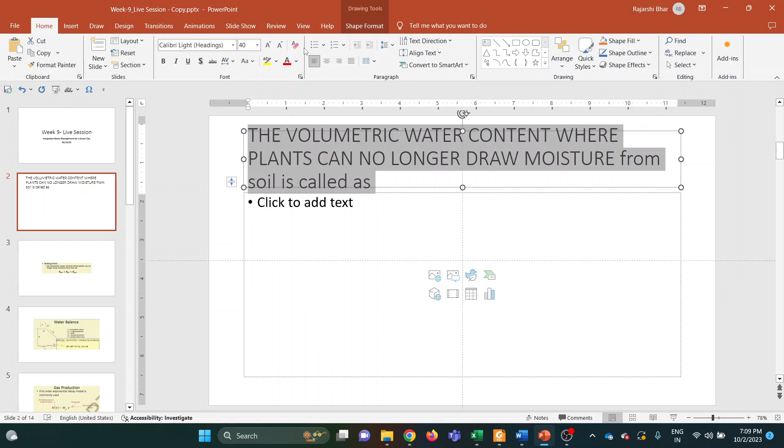The first question, I will type it first. So the question is, the volumetric water content where the plants can no longer draw moisture from the soil is called. A very basic question which we have also read or been taught, I hope, in some of our school days. I will share the options. So these are our options. You can have about 1 or 2 minutes to think about it and then I will reveal the answer.

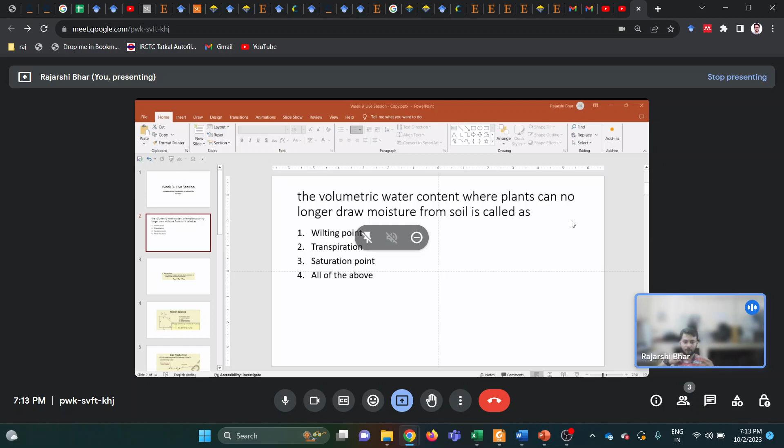Hello. Hello? Yeah. Actually, I'm a bit behind with the course. I have only finished week 8. Week 9 I haven't started yet. So today's discussion is only about week 8, 9, right? Yeah. Okay, so then it's fine. I will just, these are all questions, all very straightforward. I will just discuss them and you can have an understanding of them. And in case, these are all recorded sessions, so usually they are uploaded on YouTube as well. So later on, if you want to again go through these questions, you can always use that option. Where can I find the links for these recorded sessions? Yeah, I will put it in the chat box. Okay, sure. After this, our today's live session, I will put it in the chat box. You can copy it. Okay, fine, okay.

So, okay. For this particular question, the moisture content or volumetric water content where the plants can no longer draw any water from the soil is known as wilting point. After that, the plants start wilting. So this was our first question. Okay, so, okay, fine.

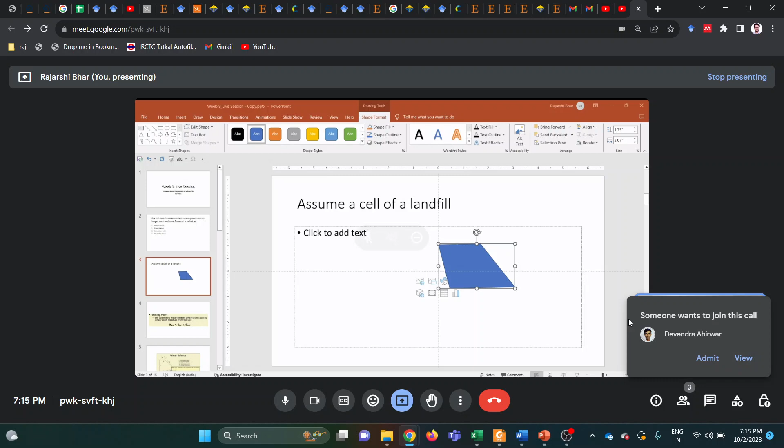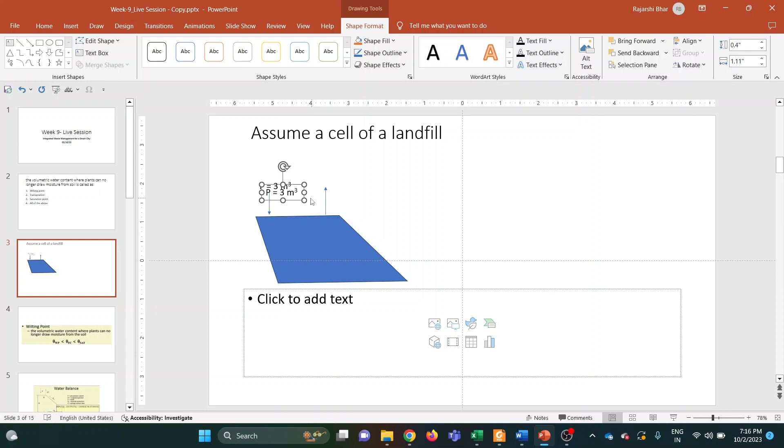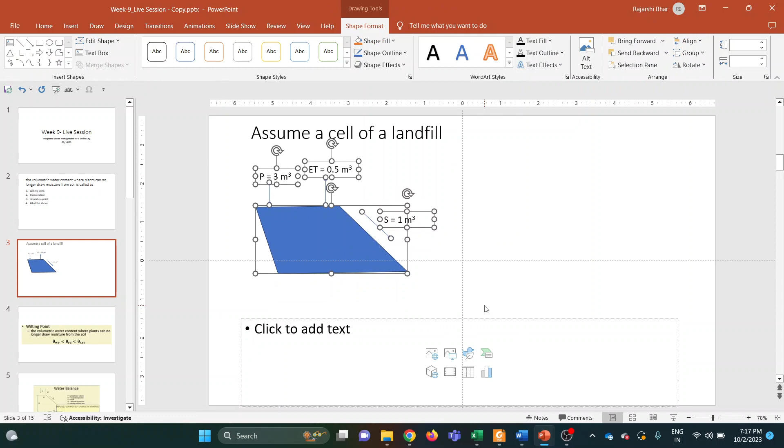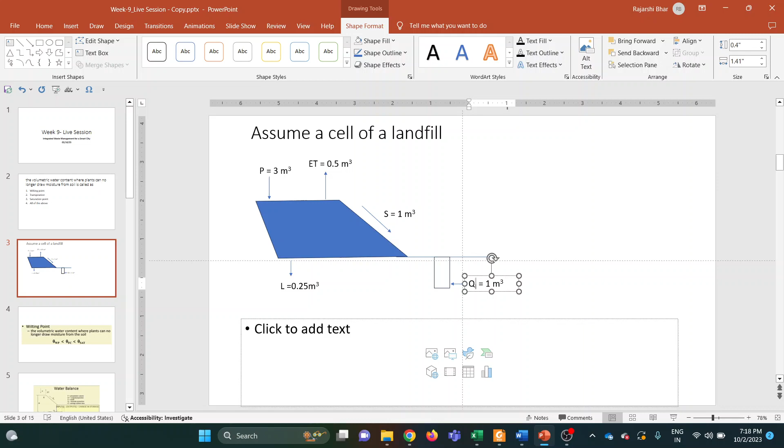Okay, so this is a cell of a landfill. Let's assume that, and I will give you a few data points. P is the precipitation happening here, and the total volume is 3 meter cube. Then we have evapotranspiration, which is 0.5 meter cube. S is the surface runoff. L is the leachate that is seeping out of the landfill liner. And then this is a leachate well. So your question is you have to find out how much of the leachate will be collected inside this landfill.

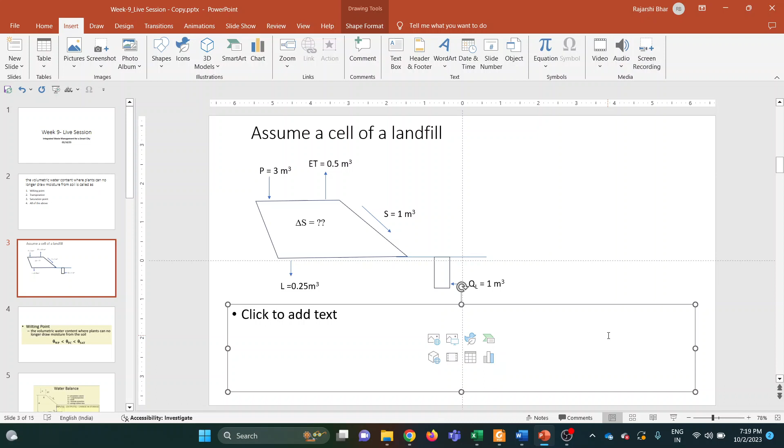So this is the landfill, and usually we denote it this way. This is what we need to find out. I'll repeat the question again: this is a landfill cell where you have to calculate the amount of leachate that will be collected, where P is the precipitation in meter cubes, ET is evapotranspiration, S is surface runoff, QL is the leachate getting stored in the leachate well, and L is the leachate leaking out of the landfill liner. How much leachate will be stored inside the landfill? This is a very simple and basic question. In fact, even someone who doesn't know about landfills can solve this, since it's just a simple mass balance equation. You can take about 3-4 or 5 minutes to think about this question, then we will solve it if needed.

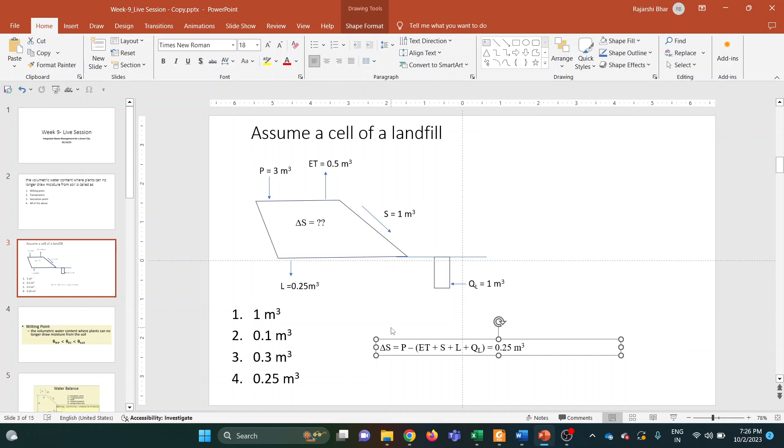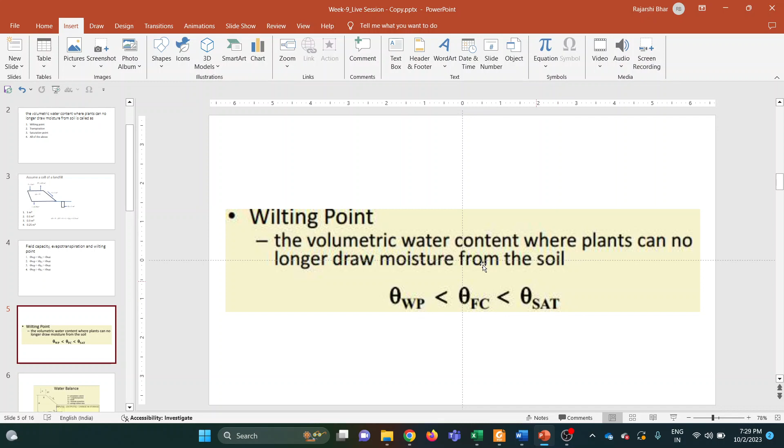As I explained in question number 1, you can see this correlation: wilting point is the lowest one, followed by field capacity and then saturation. So if you look at this question, option 2 will be the correct answer.

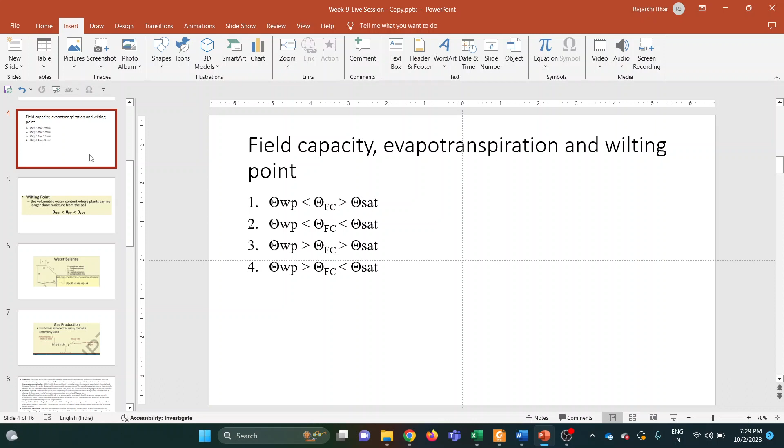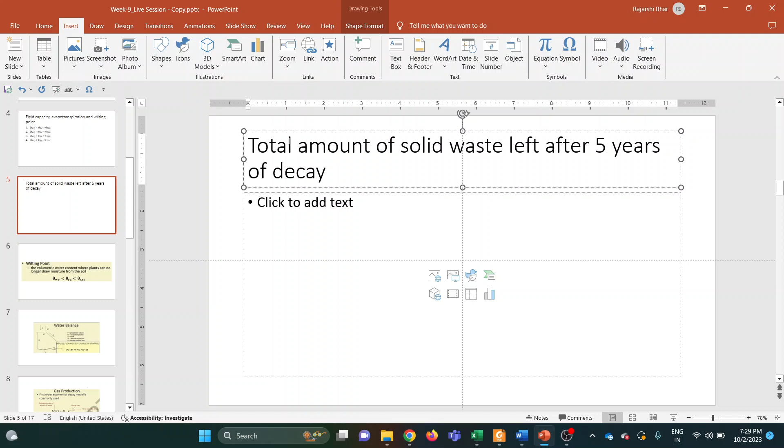Now we will move on to the next question, which is a numerical type question wherein you have been given the total amount of solid waste left after 5 years of decay. So this is what you need to find out. What you have been provided is initial waste, which is 1 kiloton, and decay rate 0.4 tons per year.

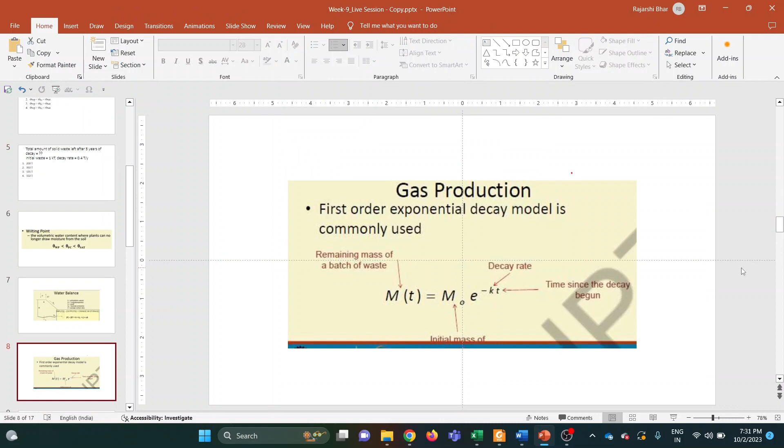A small hint for this question: you can calculate the mass that will remain after 5 years by using this first order exponential decay model. MT is the mass remaining after T amount of time in years, and is equal to m naught e raised to the power minus kt. This is similar to the BOD equation that we often use to determine the BOD of certain waste after certain amount of time. So you can make a note of this particular equation and use it to solve the question.

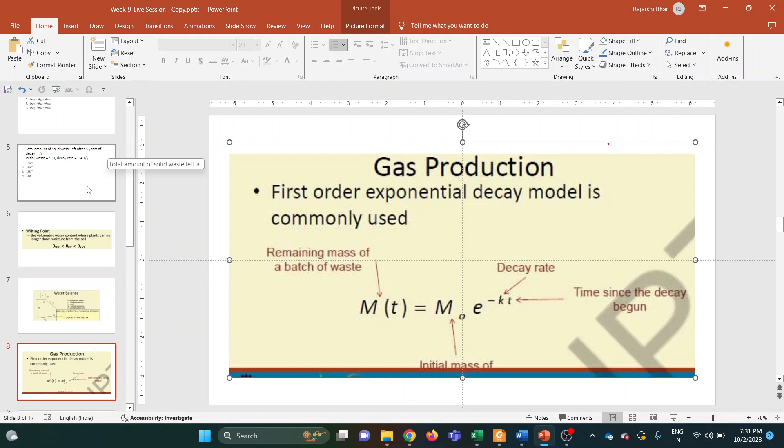I hope you have noted this down. So I will show the question now. You can use the chat box to share the answer, otherwise I will solve this particular question in about 2 more minutes.

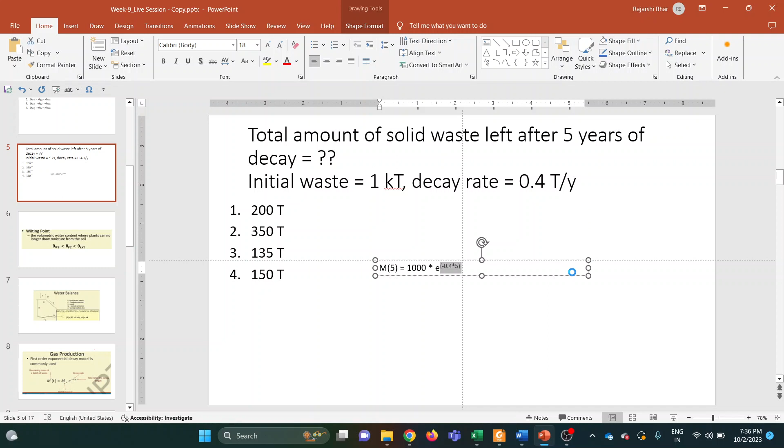Okay, quickly I will solve this. There is nothing complex to solve; you can use a calculator. MT is the amount of solid waste that will remain after 5 years. So initial mass is 1 kiloton, that is 1000 tons, into e raised to the power minus kt, and k is 0.4, into t, where t is the time, that is 5 years. If you solve this equation, you will get the answer, which is around 135 tons, 135.33. So option C is the correct answer.

Now moving on to the next question, which is again a numerical based one. You have to find out how much methane is produced from degradation of SW, solid waste, and the amount of solid waste you have is 1 mole, and this solid waste is getting degraded in landfill. The chemical formula of the solid waste is also shared: C100, H250, O50, and N4.

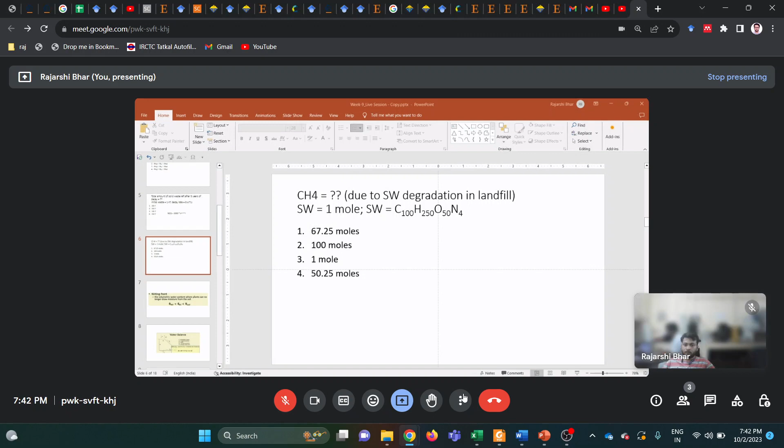Okay, so the formula that you need to use for this particular question will be this one. You can quickly note it down somewhere. This is the chemical formula of the solid waste, and based on this you can use: 4a plus b minus 2c minus 3d, whole divided by 8. This will be the number of moles of methane that will be produced. Based on this, you can simply use your calculator to find the same.

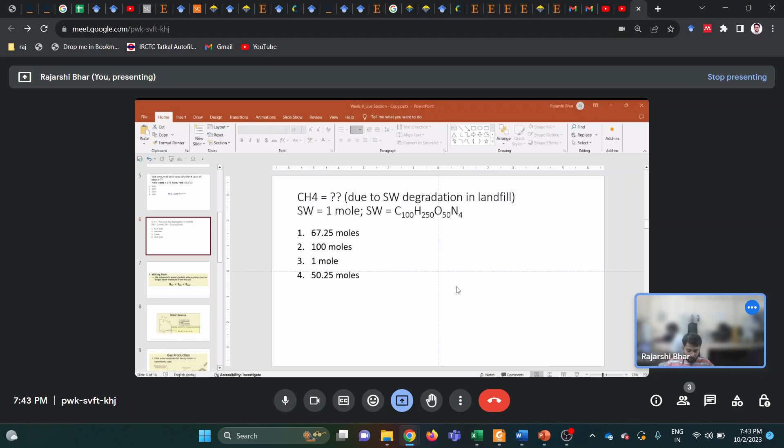So now this is very easy, I hope you can quickly calculate the answer. Simply using that particular equation, the correct answer is 67.25 moles. So now we will move on to the next question.

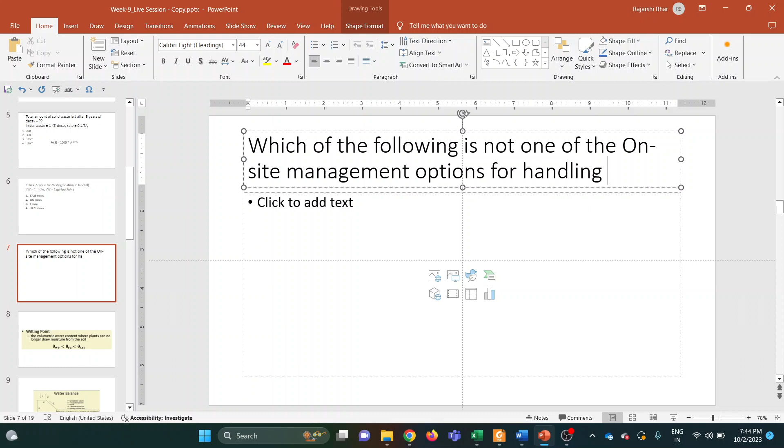And this is a normal theoretical based one: which of the following is not one of the on-site management options for handling of construction and demolition waste? Yeah, so these are your options. You can take a couple of minutes to think about the answer, and then we will have a small discussion of the same.

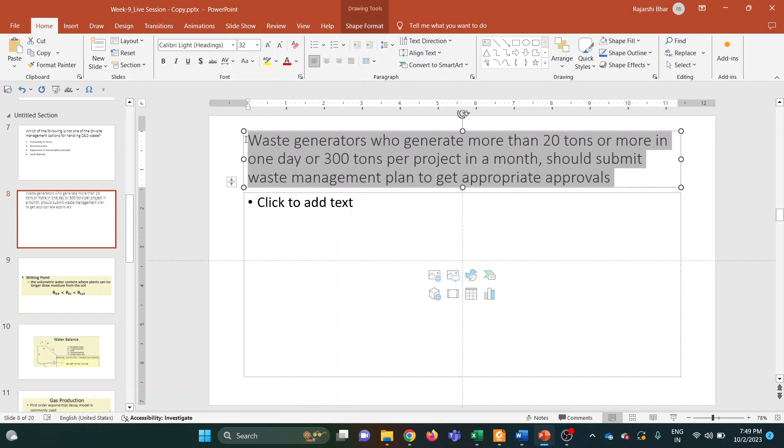The statement is: waste generators who generate 20 tons or more of waste in one day, or per project generate about 300 tons or more waste each month, should submit a waste management plan to get appropriate approvals. So the keyword is 20 tons or more per day, or 300 tons or more per project each month - in that scenario, they have to submit a waste management plan. So do you think it is true or false?

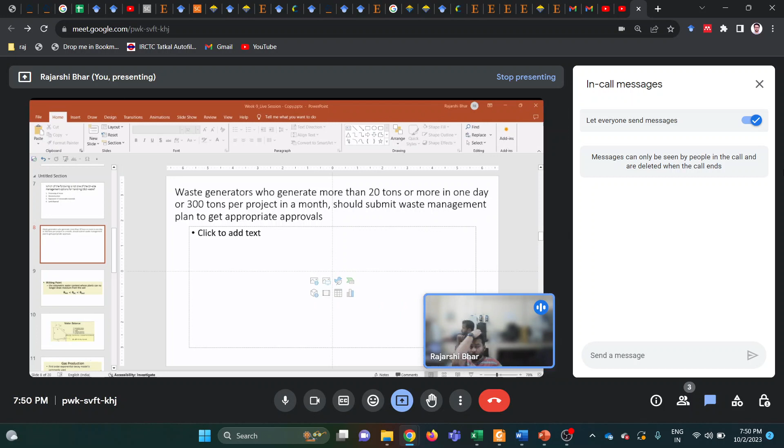You can use the chat box to type your answer as well.

Now moving on to the next one. Okay, so this is also a very basic question that we have studied in our schools.

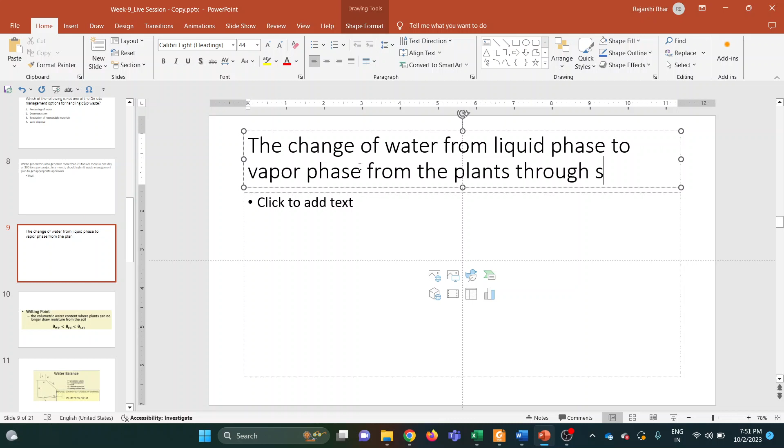So when water is converted from liquid phase to vapor phase from plants through the stomata openings, what is that event or process called? Your options are these. You can think about this for 2 minutes.

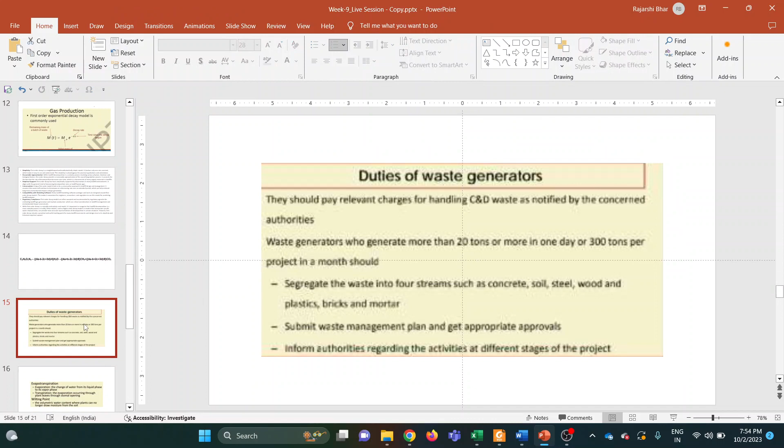Just a note, what will be the difference between evaporation and vaporization? This is very crucial because in both definitions, liquid phase water is getting converted to gaseous phase. In case of evaporation, the conversion occurs below the boiling point, but in vaporization, by definition, the conversion of liquid phase to gaseous phase occurs at the boiling point of that particular liquid. So that is the basic difference.

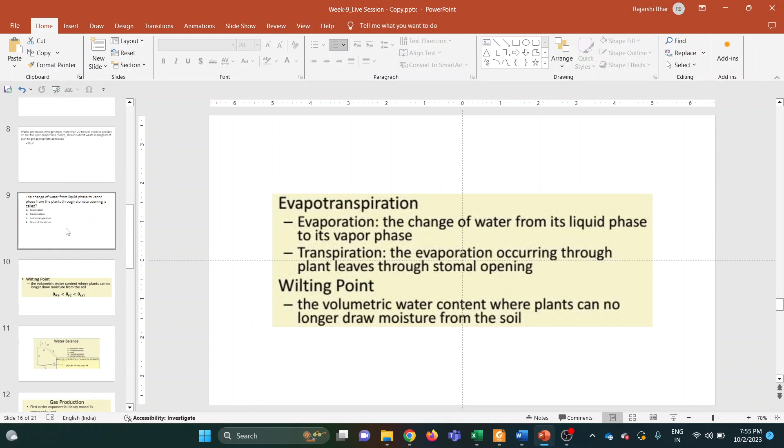So now we will be moving to the next question.

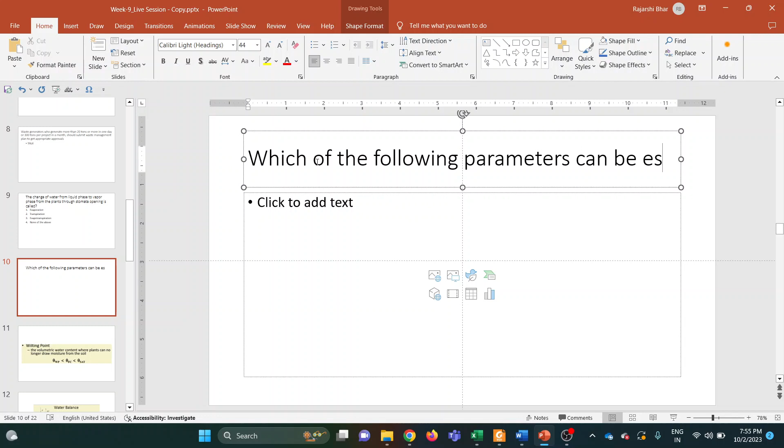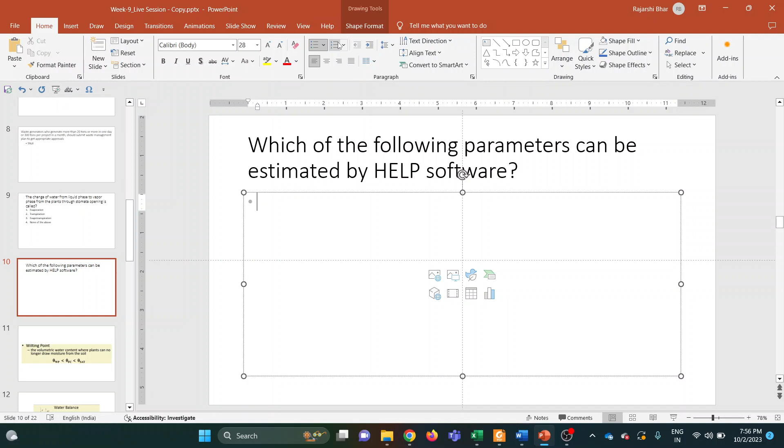So which of the following parameters can be estimated by the HELP software? HELP model is hydrologic evaluation of landfill performance, so the short form is HELP. Which of the following parameters can be estimated by using this model or software? And your options will be...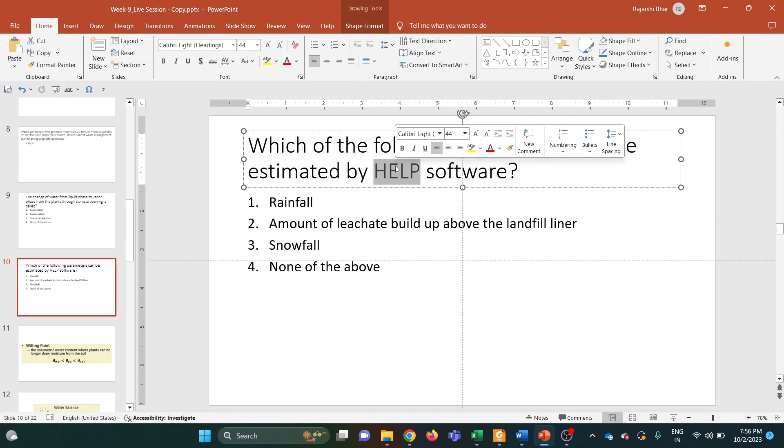Okay, you can have 2 minutes to think about this question. Very simple and very easy. HELP full form is hydraulic evaluation of landfill performance. For these kind of questions, even if you don't know the parameters, if you look at the options and apply common sense, it is very easy.

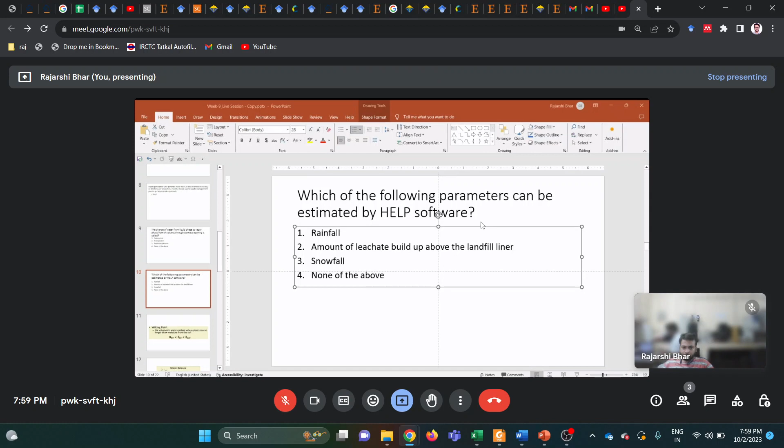Okay, so the correct answer for this particular question is option 2. This software can help me calculate the amount of leachate buildup in the land above the landfill liner. So now we will move on to the next question.

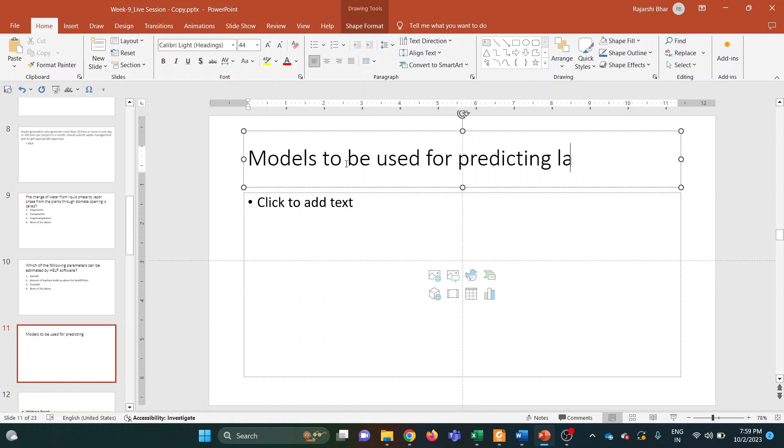So which of the following models will be used for predicting landfill gas generation? One will be the HELP. You can again have 2 minutes to think about this question.

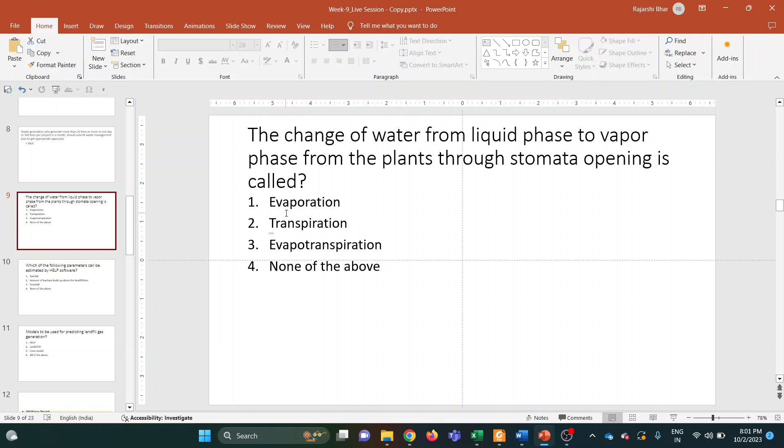So this is what we see around us in various seasons. Now, in the next question, the point being asked is which of the following parameters can be calculated using HELP software. The correct answer is the amount of leachate buildup in the landfill above the landfill liner. That is one of the parameters it can help us calculate.

And in this particular question, you have to select the model that is used for calculating or predicting landfill gas generation. You can have about 1 minute to think about this.

So the right answer for this particular question is LandGEM. If you want to know the full form, it is Landfill Gas Emission Model - G is gas, E is emission, M is model. So this is the full form. Moving on to the next question.

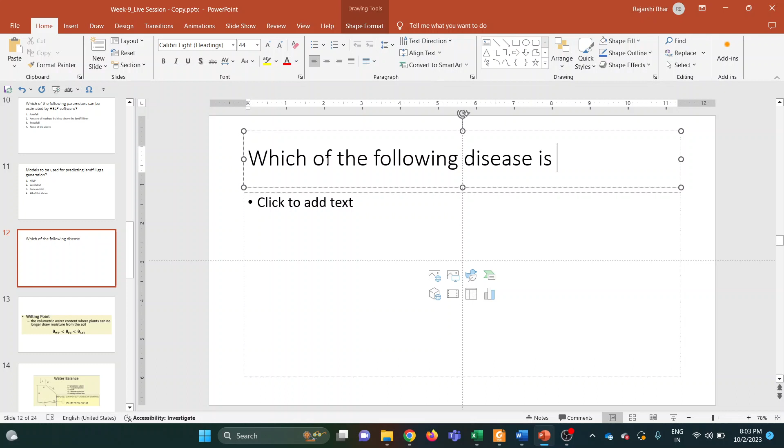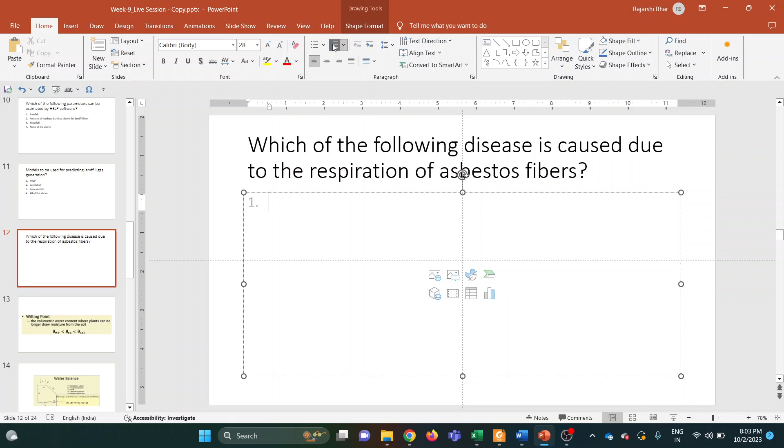So the question is, which of the following diseases is caused due to the respiration of asbestos fibers? I will write the options. You can think, you have 1 minute.

So lung cancer is the correct answer in this particular question. Apart from lung cancer, there is another disease that can be caused due to it, and this disease is mesothelioma. If you want to read about it, asbestos exposure is one of the primary risk factors that causes this disease, and it accounts for up to 80% of all the cases. Then, living with someone who works with asbestos may also increase an individual's risk for developing this disease, because asbestos particles can travel on skin and clothing. That can be another reason - people who live with someone who works with asbestos will also be at risk of this disease. So now moving to the next question.

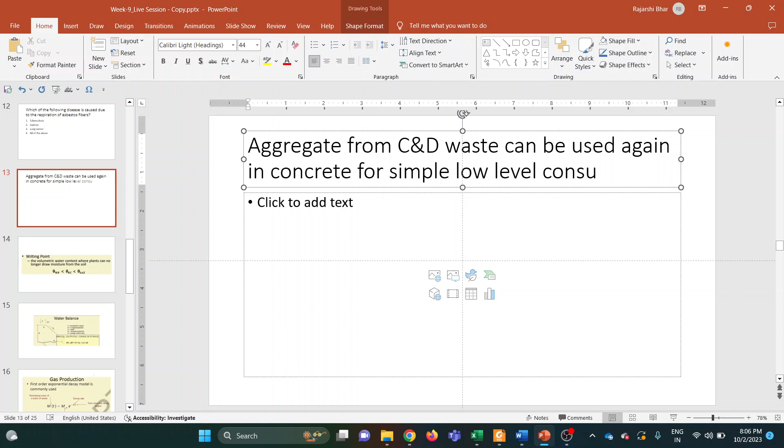It is a true and false type question. So the aggregate that you obtain from C&D waste can be used again in concrete in simple low level construction buildings. Very easy - what do you think, is it true or false?

So the correct answer is true. Now coming to the next question.

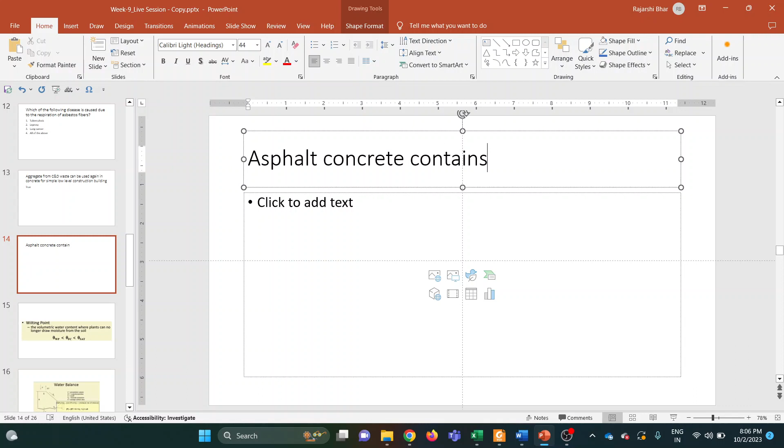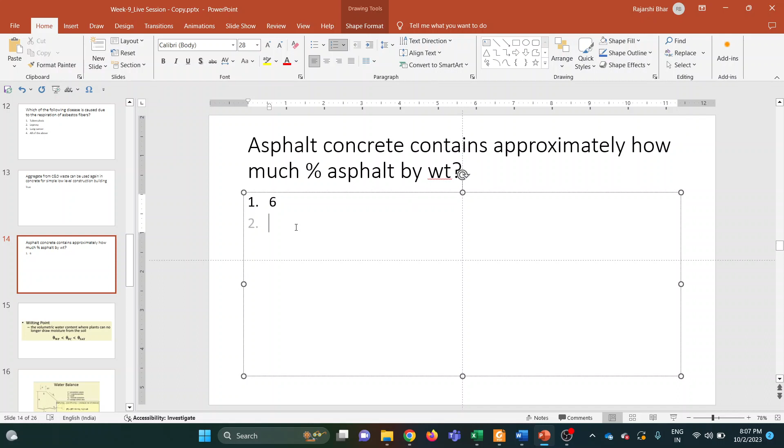So in asphalt concrete, how much percentage of asphalt is there by weight? So this is the question - in asphalt concrete, what is the proportion of asphalt by weight? All the options are in percentages. So these are your options.

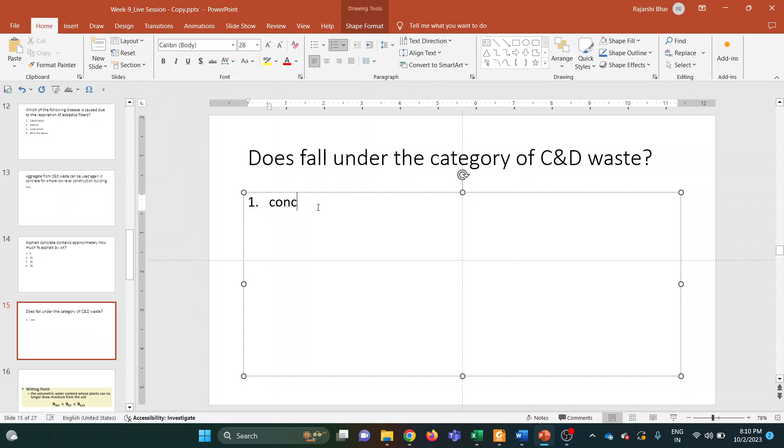In the next two questions, there can be more than one correct answer, so I will type them down. First is: which of the following falls under the category of C&D waste? These are your options. You can think about it for 1 or 2 minutes.

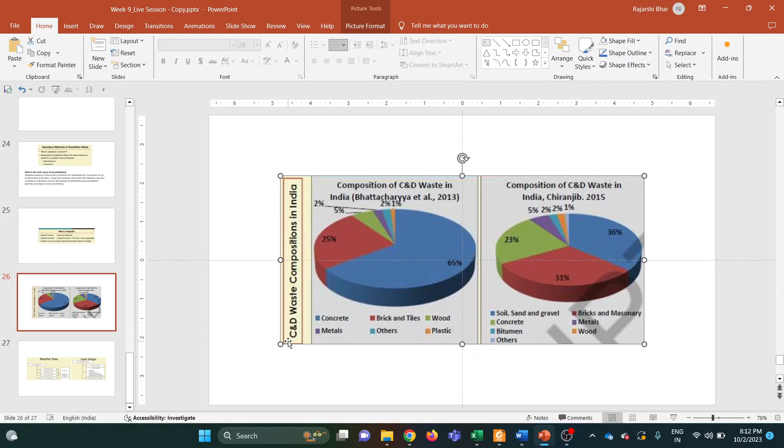I think I have a slide also for this. You can see the different proportions of C&D waste in India, and this study is a bit older, 2013, but still relevant. 65% of the C&D waste mostly comprises concrete, while after that we have 25% belonging to bricks and tiles, then 5% due to wood, about 2% each for metals and others, and finally 1% belonging to plastics.

Then a more recent observation from 2015, another study, showed that bricks and masonry contained about 31%, 36% was due to soil, sand, and gravel, 23% due to concrete, and 5% for metals. The remaining were other minute amounts.

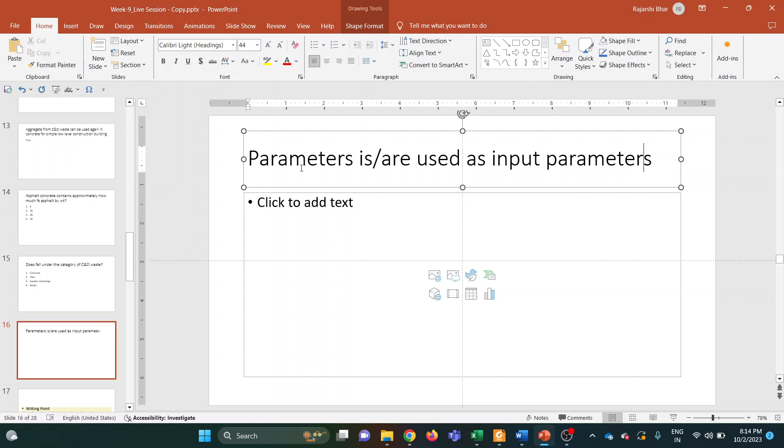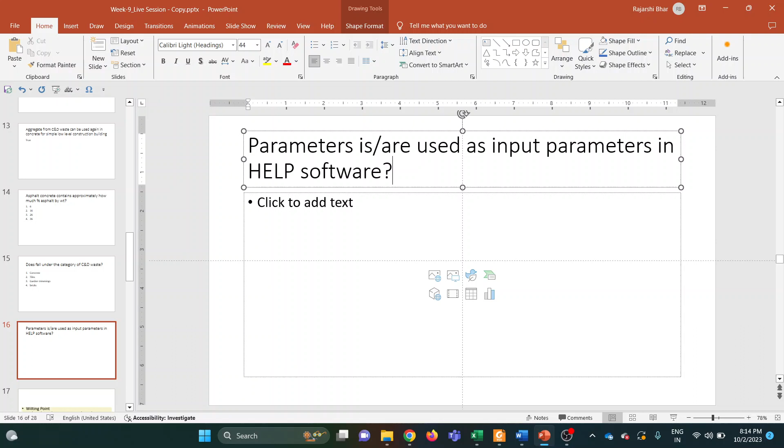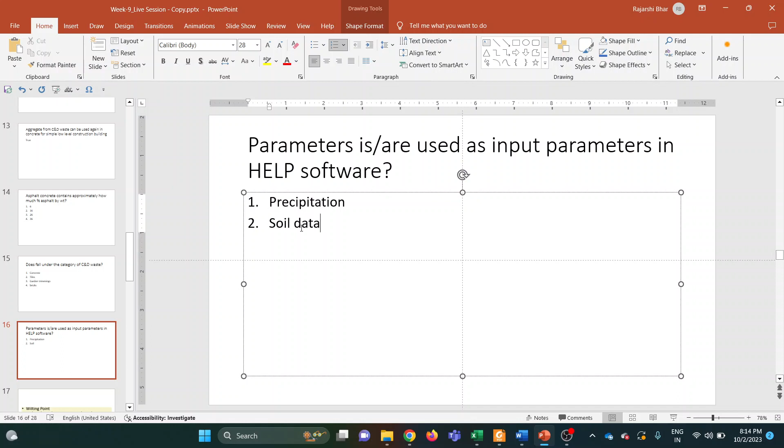Now we will move on to the last question of this live session: which of the following parameters is or are used as input parameters in HELP software? Mentioning the full form of HELP again: Hydraulic Evaluation of Landfill Performance. That is the full form of the software, and these are the options. You can think about it for a minute.

Okay, so here the correct answer is precipitation, soil data, and solar radiation. These are the input parameters used in HELP software, but not the biotic data.

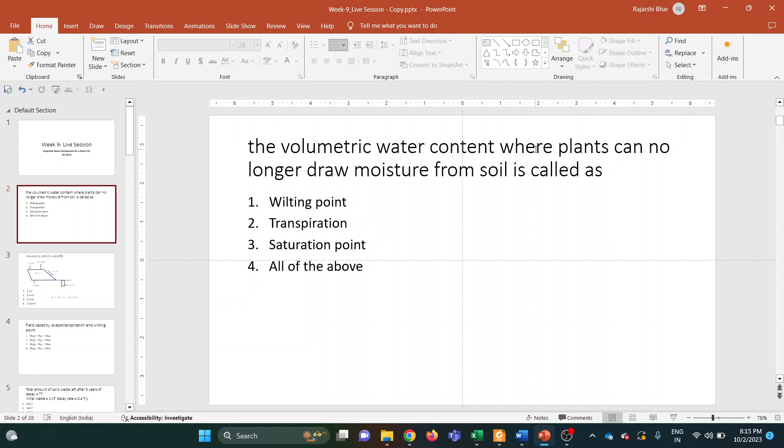So now we will quickly go through today's questions again. The first question was: the volumetric water content where plants can no longer draw moisture from soil - what is that known as? It is known as the wilting point.

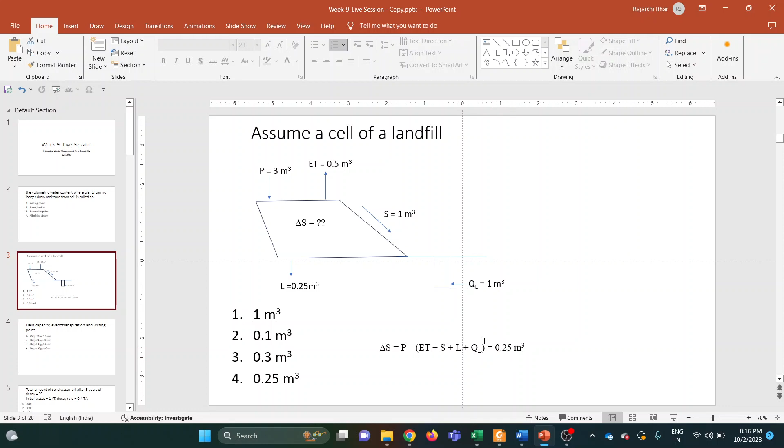Then the second was an easy numerical type question where you are provided precipitation data, and you have to calculate the amount of leachate that will be collected and stored inside the landfill cell. The data shared includes precipitation of 3 meter cube, losses like evapotranspiration, surface runoff, leakage to the landfill liners, and the leachate collected in the leachate well. You have to calculate the amount stored inside the landfill. Following simple mass balance concepts: total precipitation minus all the other outflows gives you the amount stored inside, which is 0.25 meter cube.

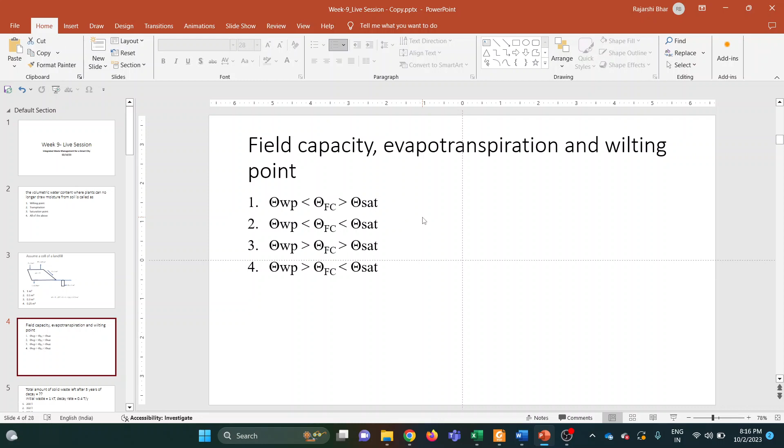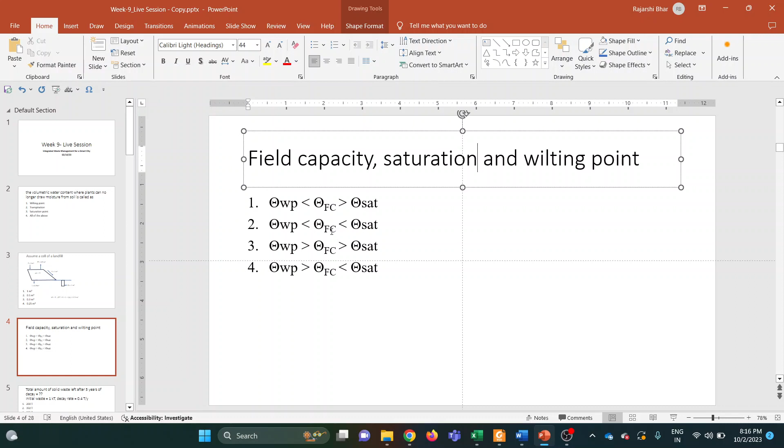The next was a question related to the hierarchy between field capacity, saturation point, and wilting point. Among these, the highest moisture content refers to the saturation point, followed by field capacity, and last is the wilting point.

Now moving to the next question: total amount of solid waste that would be left after 5 years of decay. You need to calculate this given the initial amount of solid waste and the decay rate. What you have to do is follow the first order exponential decay model, where MT, the mass of waste remaining after T years, equals M naught times e raised to the power minus KT. K is the decay rate and T is the time. Use that formula and you will get 135 ton as the answer.

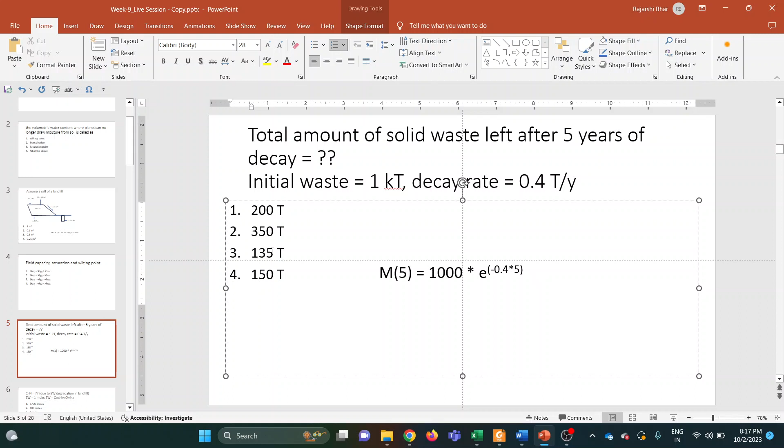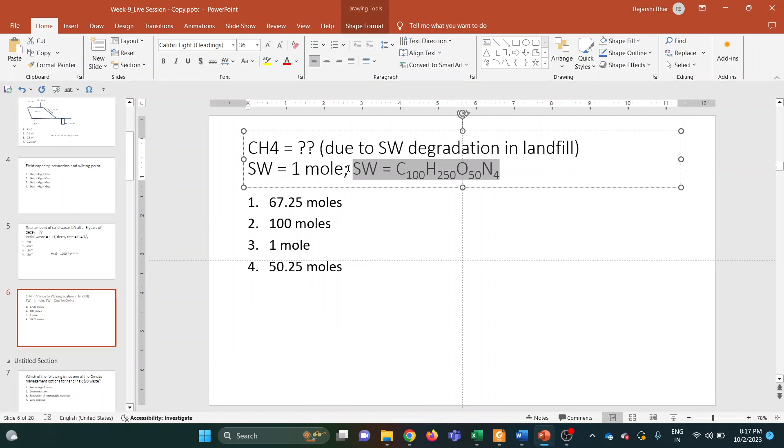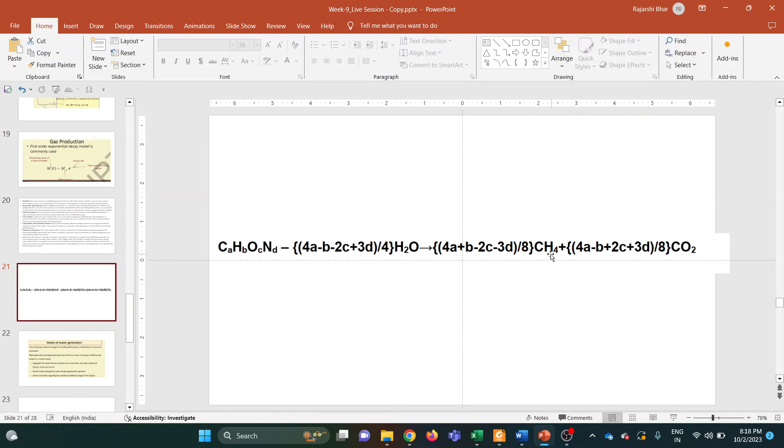Then the next question was about a landfill where the solid waste amount is 1 mole, and you have to calculate how much methane will be generated, given the chemical formula for the solid waste. To solve this, there's an equation where the solid waste gets converted to methane: 4a plus b minus 2c minus 3d, the whole divided by 8, gives the moles of methane generated. Use this and you will get the answer.

Using this 67.25, that will be the answer.

Which of the following is not one of the on-site management options for handling C&D waste? When handling C&D waste at site, you can process the waste and reuse it again. For example, if demolishing a brick wall, you can use those crushed bricks as foundation material. Then there's deconstruction, separation of recoverable materials like plastics or reinforcement - this is another on-site management option. Finally, land disposal is not occurring on site, it happens at some other site. So in this question, option D is the correct answer.

Next is a true and false type question: waste generators who generate 20 tons or more of waste per day, or for each project where waste generation is 300 or more tons per month, should submit a waste management plan to get appropriate approvals. This statement is true.

The next statement: what is the change of water from liquid to vapor phase known as when it occurs through plants, particularly through the stomata openings? It is known as transpiration.

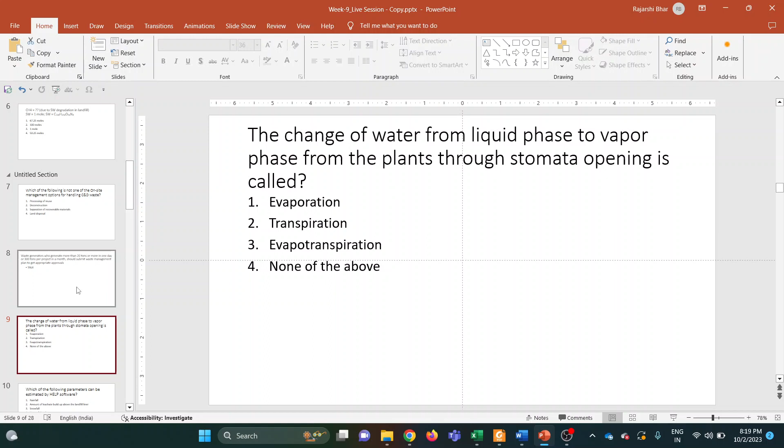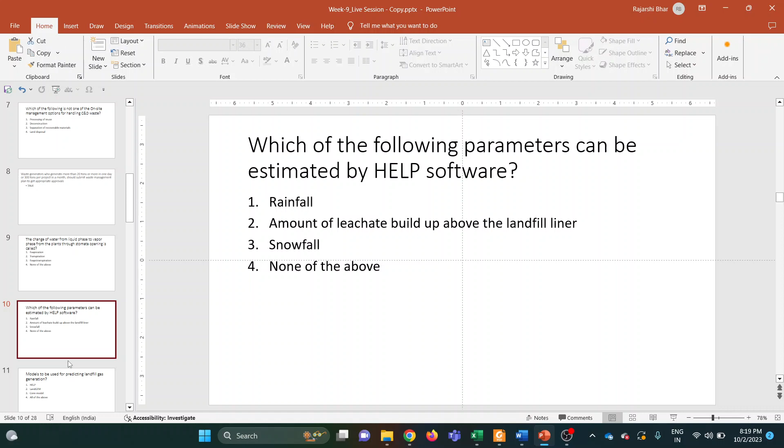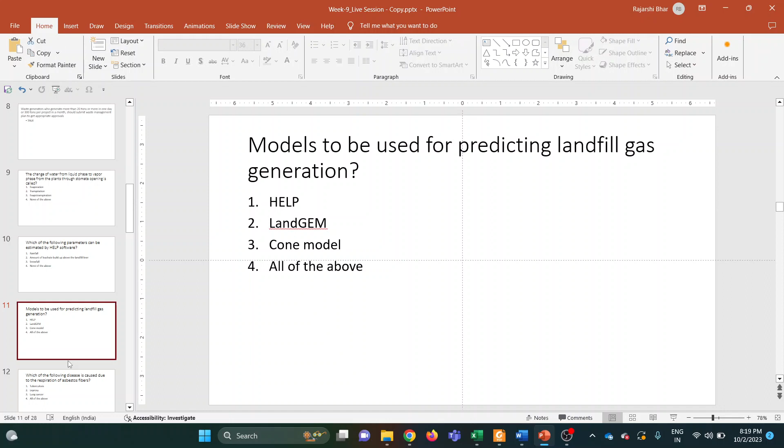Next question: which of the following parameters can be used to estimate with the HELP software? The answer is option 2, the amount of leachate buildup above the landfill liner that can be calculated through this software. The model used for predicting landfill gas generation is the LANDGEM model, landfill gas emission model - that is the full form of LANDGEM.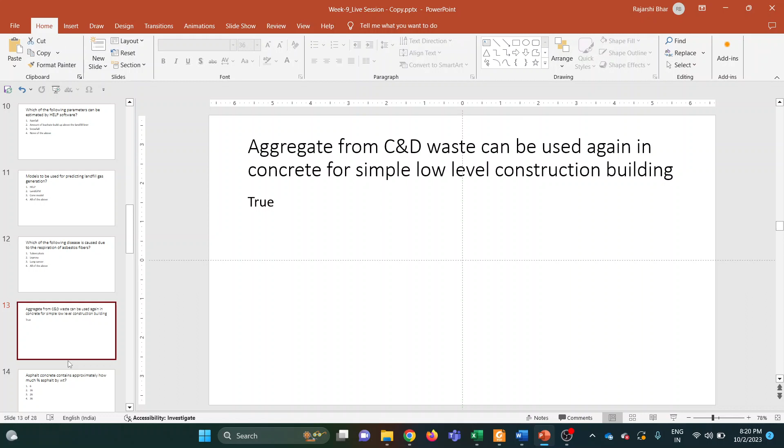True and false statement: whether aggregate from C&D waste can be used again in concrete for simple low-level construction buildings. The answer is true.

Asphalt concrete contains approximately how much percentage of asphalt by weight? The answer is 6%. Then, which of the following falls under the category of C&D waste?

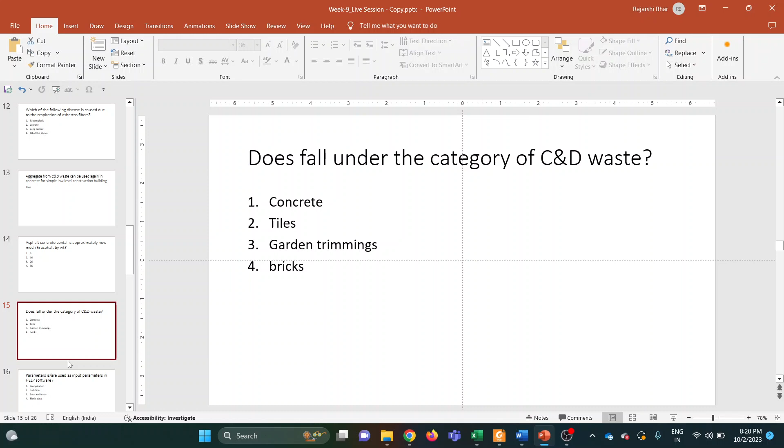This is a multiple choice question where there can be more than one correct answer. Concrete, tiles and bricks are the correct options.

Finally, the parameters used as input parameters in the HELP software are precipitation, soil data, and solar radiation. Biotic data is not one of the input parameters.